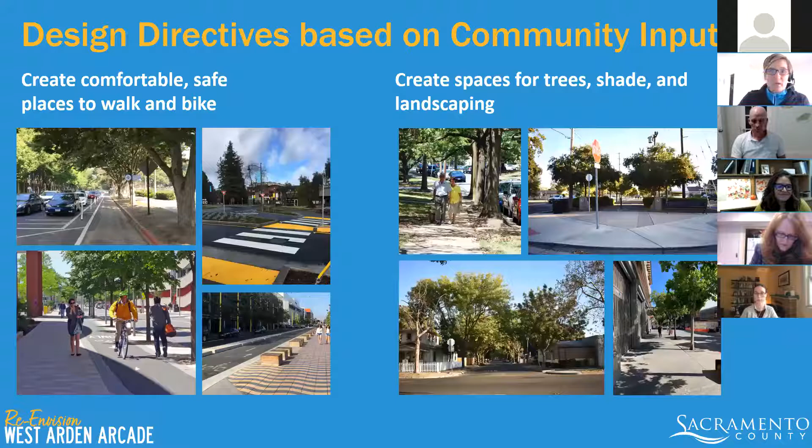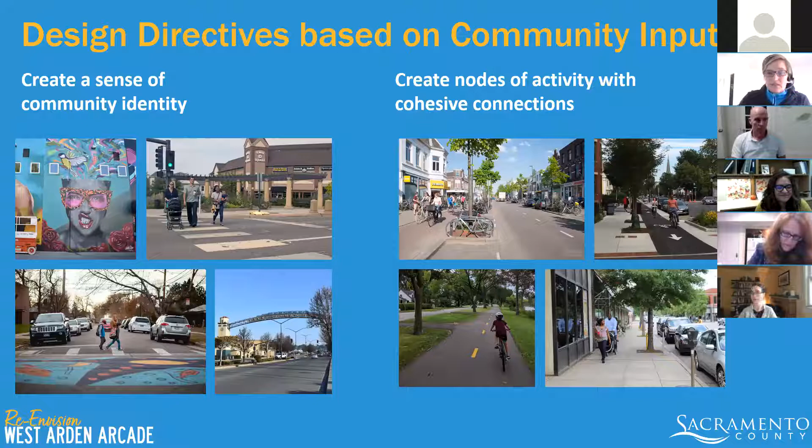So based on all the community input, I'd like to mention again our design directives: creating that comfortable, safe places to walk and bike; opportunities for shade and trees and landscaping; creating a sense of community identity; and creating nodes of activity with cohesive connections. So again, with those design directives, we dove in again this week, and I'm going to give you an overview of kind of what we worked on this week.

So we focused a lot on the elements of the street. So what does that mean in terms of designing for comfort and safety and experience? We'll talk a little bit about how that looks like on a sidewalk, bikeways, and different elements.

The importance of a network. We continue to advance the idea of these framework streets, and we'll dive into that and some examples. We'll talk about neighborhood spot treatments and those ideas there, and then we'll talk about context appropriate redevelopment, so opportunities in the built form, and what we've heard from you and how that's then advanced into some design solutions.

And then at the end, we'll talk about how it all sort of comes together at the Arden Way, specifically 2 community nodes, Arden Way and Watt, at Watt to Morse, and then Hurley and Fulton.

Throughout, we'll be doing some interactive polling during the presentation. For those of you who are joining by phone, the online polling doesn't work for you, but I want to mention that we will continue to ask these questions at the end and have a more detailed discussion at that time.

So back to the street elements. Some of our guiding principles that emerged through a lot of different conversations with folks is about considering the most vulnerable users first. So that's our design vehicle, as it were, or how we talk about it. Think beyond what we call the Americans with Disabilities Act compliance and employ best practices in universal design. So this is thinking about how we really accommodate folks who have any kind of mobility or impairments and how they navigate our streets. Safety and comfort and experience.

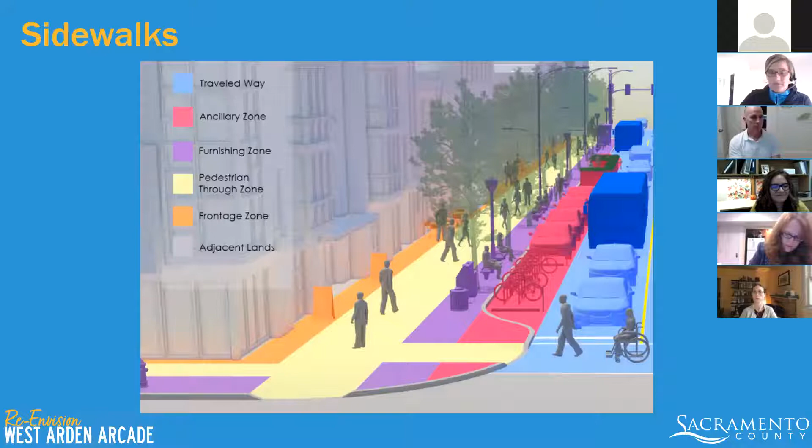Bikeways - we're talking about a number of bikeways to the community. All of the arterial streets, or main streets, network streets that you have in your community, are identified in the bike plan to become bikeways if they don't already have bike provisions. What we like to suggest to communities that have the space is to make bikeways as comfortable and protected as possible, so that's removing the bikeway from on-street if at all possible, or creating some sort of buffer.

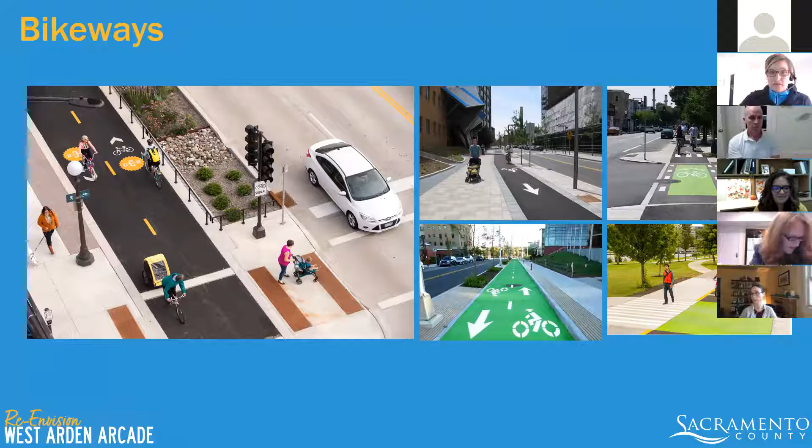Parking opportunities along the area too, as we talk about some of the redevelopments. Sometimes that means interior parking areas may be changed, reconfigured a little bit, but there are opportunities to park along the streets as well, and allowing for that to happen. Those become opportunities also for green infrastructure, like I've shown before.

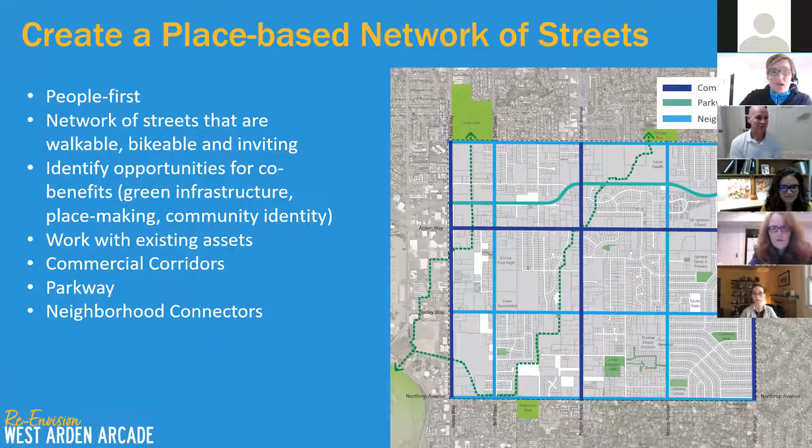A commercial corridor - those are streets we're considering, and it's part of your general plan in terms of the language. A commercial corridor is something that allows for access to different businesses.

Some of the areas in particular, streets in particular, are Howe, Fulton, Arden Way, and Watt as key commercial corridors. These are going to be perhaps the ones closest to any of the goods and services and businesses that the community has.

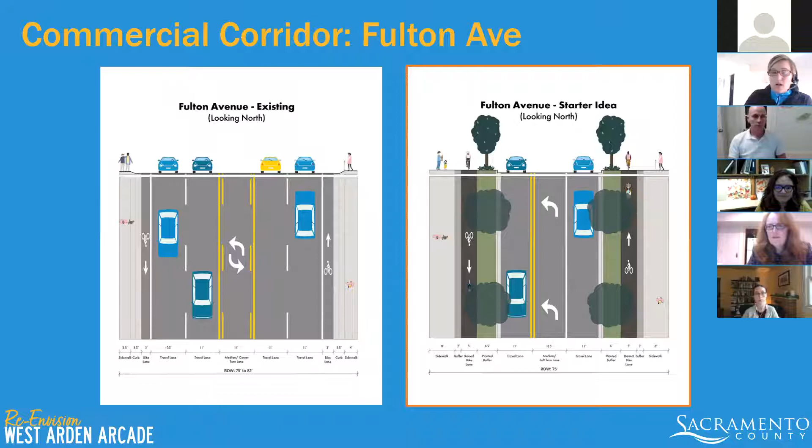Here's an example starter idea of what we're thinking. We proposed this last time, and we're saying it still has good merit to rethink how some of Fulton is repurposed to be more comfortable and to create a better walking and biking environment. You can see in this instance on the right, the graphic shows the implementation of generous sidewalks along with a separated bikeway facility, some green landscaping, and to do that, it would require rethinking the space that's allocated to motor vehicles. We've looked at the traffic volumes on the street and think this is definitely a feasible option along Fulton Avenue.

So what that might look like, again, we've shown a number of these images at this point, but bikeways adjacent and right next to the sidewalk, but clearly delineated by material changes. There's some different best practices we would suggest there. And then again, the incorporation of great opportunities for green infrastructure along these areas.

I think I'm going to pause there, and I'm going to turn it over to Malia to talk about our quick poll. So Malia.

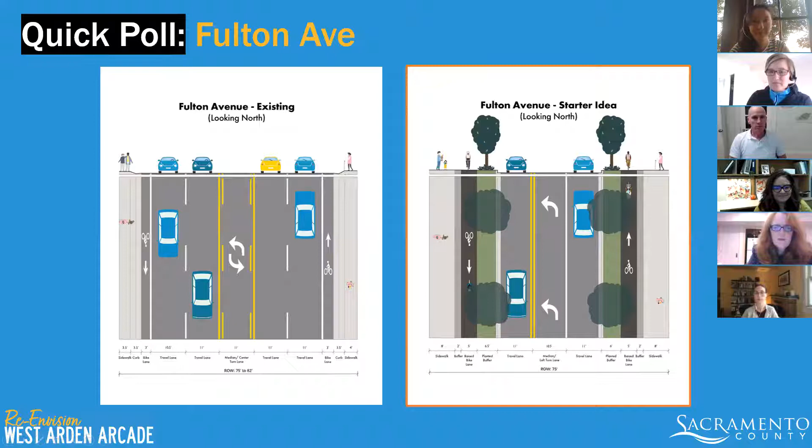Onto the Parkway, I'm going to turn it over to Ian to talk a little bit about an idea that we have for Alta Arden Expressway. We'd love to be able to call it a parkway in the future. So Ian, go ahead. Thank you, Cindy.

Well, this is an exciting corridor. It's an east-west corridor in the north part of the study area, and it just ends at Watt as a 5-lane road, and it doesn't carry enough traffic to warrant 5 lanes. So we were thinking, if it were a 3-lane road, what cool thing we could do with it, and we thought we could turn it from an expressway into the Alta Arden Parkway, and recycle the space into a fairly natural corridor, which would feel safe and comfortable for folks, as you can see in the image, creating a really nice kind of natural experience through the city.

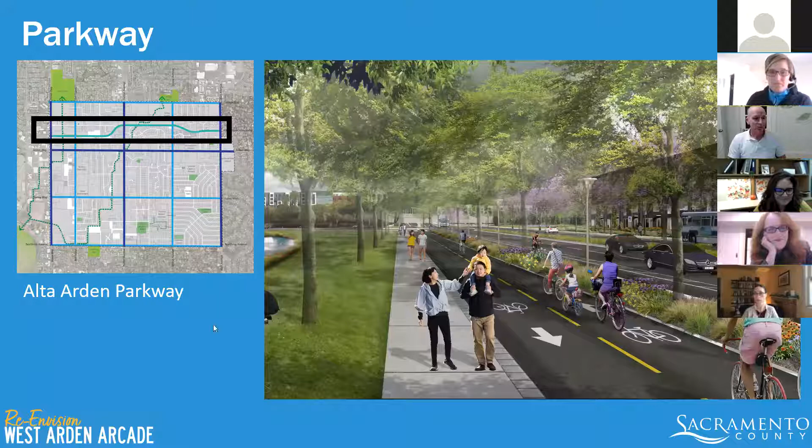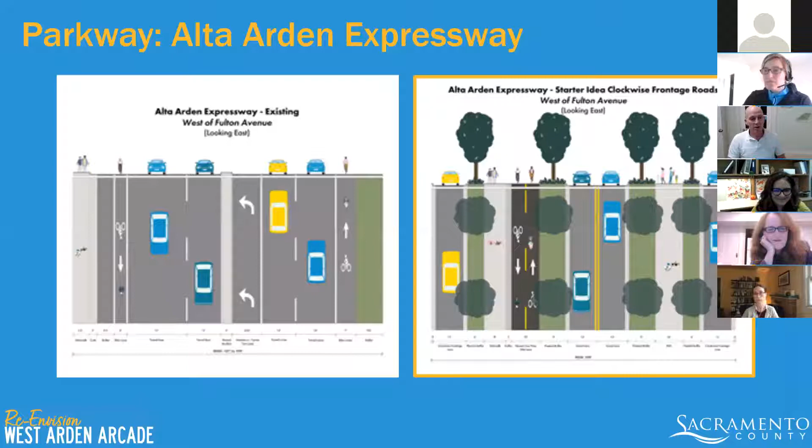We have some starter ideas to get the juices flowing. One of the characteristics of parkways is this nice continuous experience through the park, instead of stopping and starting. So one of the things we're thinking about is controlling the intersections with roundabouts as opposed to signals, which gets rid of the clutter of all the signals and creates a more natural feel.

It would go the whole length of the study area, probably involving 8 roundabouts at the 7 current traffic signals, and one at Wyda Way, I believe. So that would be the corridor.

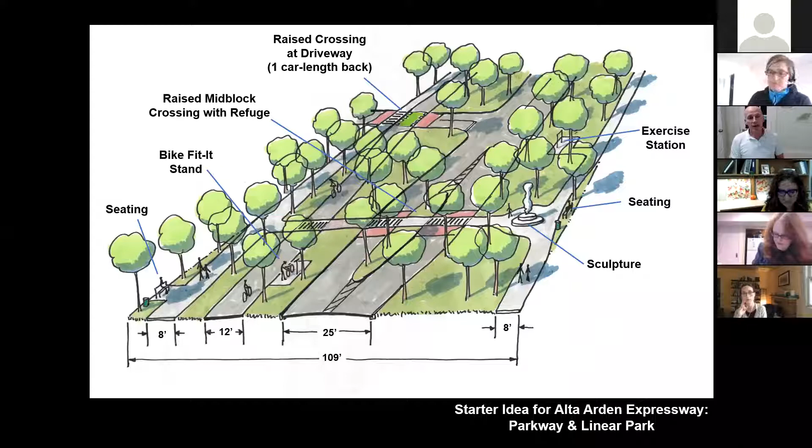One of the criticisms of roundabouts is that they're not friendly for people who are blind or have poor sight. So we've developed a roundabout design with about 10 interventions that make it much friendlier for people who can't see—for example, lining up the sidewalks properly and straight, and having tactile guides to help them find their way to the crossing and then across the street itself.

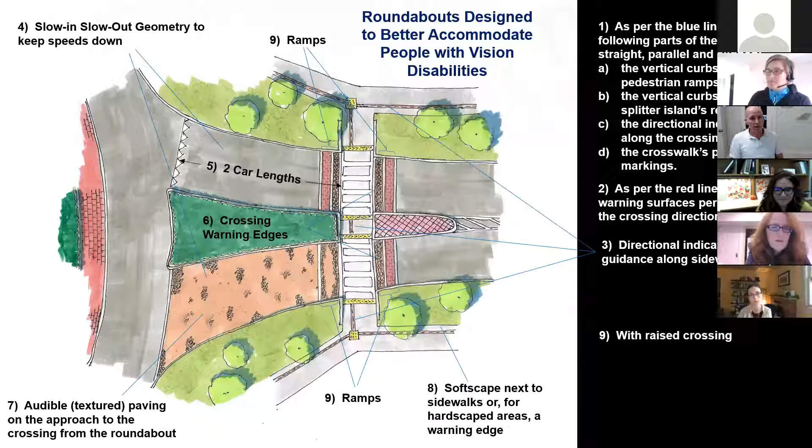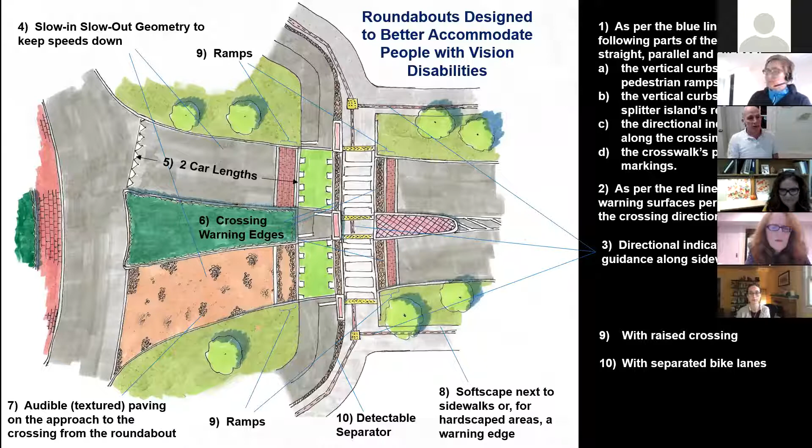That's the crossing with just the pedestrian crossing. If the bike facility were to cross, it's very similar, except with the addition of a bike facility, as shown next. This is the exact same thing, except it's got the 2-way bike facility as well, so the crossing is just a little wider to accommodate both pedestrians and cyclists. That's how you cross the street.

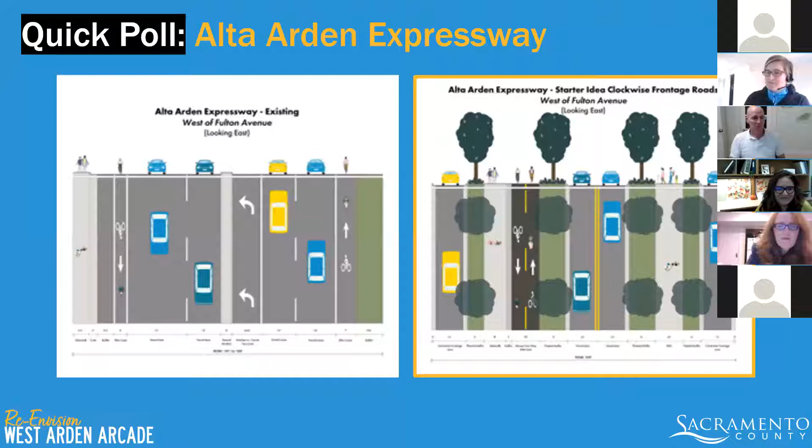Another type of street worth considering or suggesting is a neighborhood connector. These are streets that are really important to the community, perhaps a bit lower in volume, that provide connectivity—people walk and bike along these as well. These are Cottage Way, Bell Street, Northrop, Hurley, and Morse. Bell in particular serves an important function connecting folks to the neighborhood schools. So this is the starter idea we're considering there.

We mentioned this at the last discovery workshop as well and continue to get feedback on it—that this is something people would like to see: a real formalized bikeway opportunity for people to walk and bike along there, and also a more formalized sidewalk.

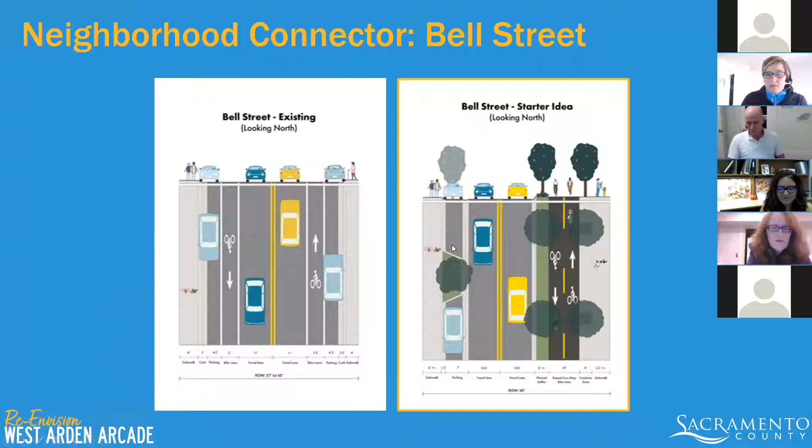So we can easily repurpose this. Right now it's one lane in each direction, and there's opportunities to really repurpose some of the space from the existing bikeway on street and the parking on one side. We can consolidate that onto one side and really make it a wonderful space accommodating all modes.

So this last poll will be for Bell Street, and the same question as before: Do you support these starter idea changes to Bell Street? You should see it pop up on your screen right now.

A couple votes coming in. We'll give it a few more seconds to see that everyone gets a chance.

Great, so similar to the previous two cross sections, it's great to hear that folks are really strongly supporting our proposed starter ideas. So thanks again for that feedback.

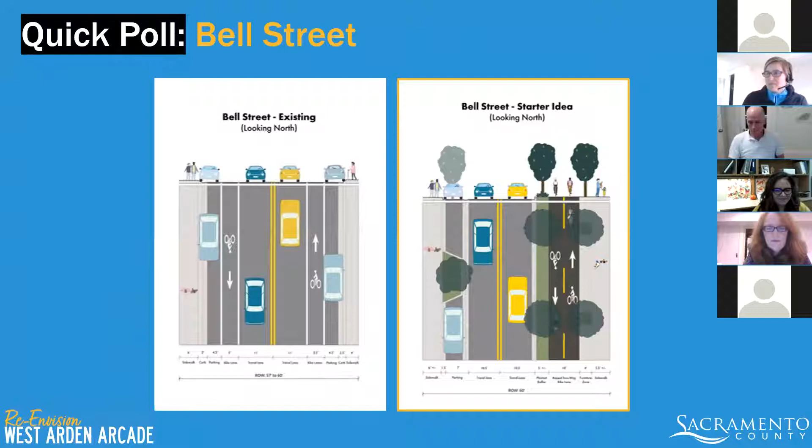Thanks, Malia. One of the things we heard last week and during this week as well is the importance of considering neighborhoods, the neighborhood streets within the area as well. We talked a little bit on Monday night about spot treatments and the options we could advance there. So we took some of the comments to heart and came up with about 7 different cross sections or spot treatments to share with you.

I'll just talk through all of these at this time. So high visibility crosswalks really increase visibility of people walking and increase the propensity of people who are driving to yield to pedestrians. These can be installed at any crossing within a neighborhood or as the neighborhood connects to and across some of the major streets.

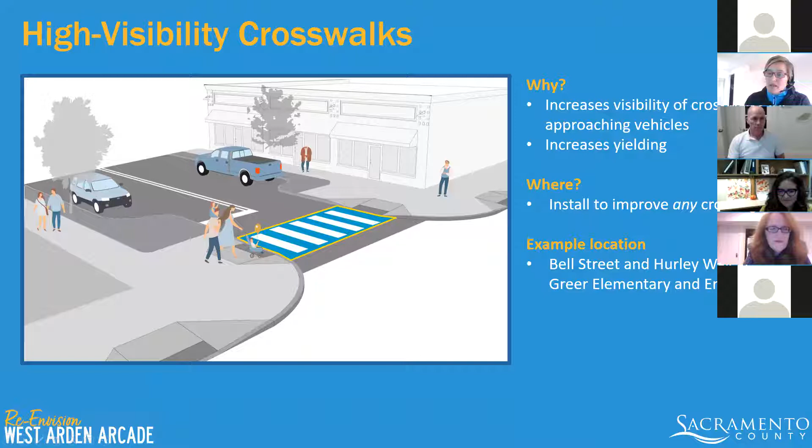Example locations, we just want to tee up a couple of those as well. Bell Street and Hurley Way, and Greer Elementary and Encina High, would be great examples of where this could work.

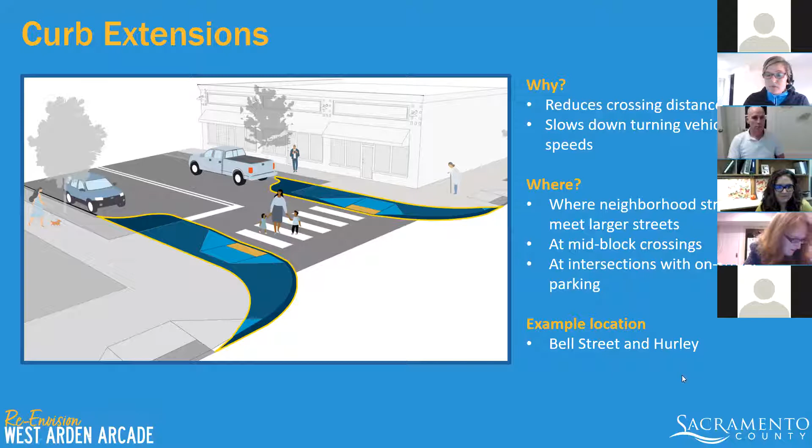Curb extensions, we've talked about this a few times, and we have opportunities for green infrastructure as well, but these are really important for pedestrian safety. They reduce crossing distances and slow down turning vehicle speeds. These could happen at neighborhood streets where they meet larger streets, also at mid-block crossings, at intersections with on-street parking as well. An example would be at Bell and Hurley. Lots of examples of where that could work.

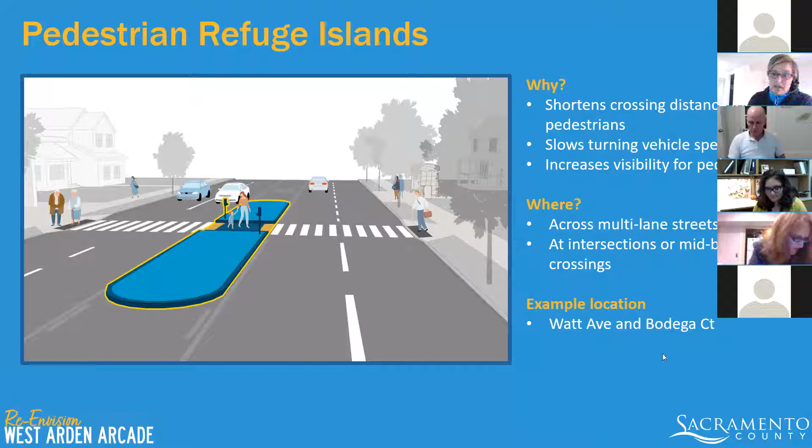Pedestrian refuge islands are also great features. You have some within your communities, particularly on Morse near the Kaiser Permanente campus. They shorten crossing distances for pedestrians, especially when you think of two different lanes going in two different directions. It basically cuts a 4-lane street down to a 2-lane street for people to cross. It slows turning vehicle speeds as well and increases visibility for pedestrians. Again, these can be very helpful at multi-lane crossings, at intersections or mid-block. Watt and Bodega would be a great example of where something like this would be recommended.

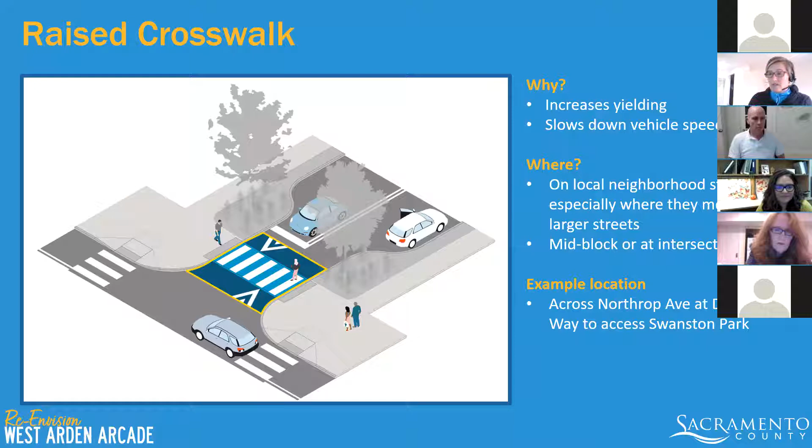Raised crossings, as well as the high visibility crossings, also help in yielding and slowing down vehicle speeds and making pedestrians more visible. They can happen on local neighborhood streets, mid-blocks, or at intersections, and in some instances we see these used at driveways as well. A place at Northrop and Dornajo, as people cross to Swanston Park, we heard about the importance of really addressing that crossing right now. There's been a good attempt at an intervention, and I think there are ways to maybe make it even better for folks.

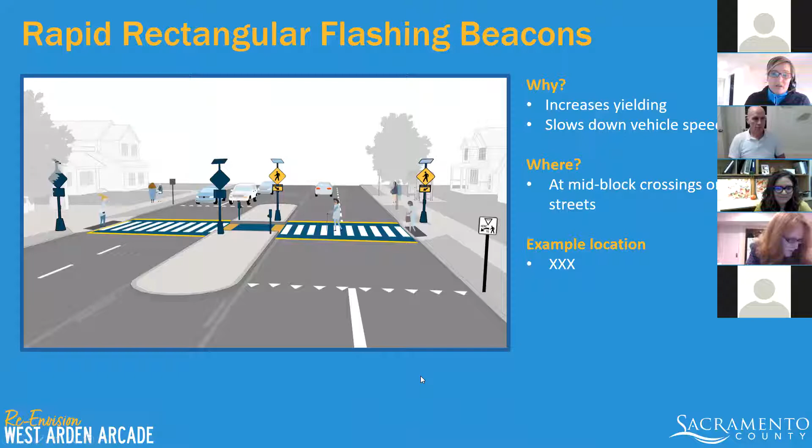Rapid rectangular flashing beacons, or RRFBs as they're called, are flashing lights that pedestrians could push that create an awareness on the street. They actually flash on and off for motor vehicles to observe, and increase yielding and slow down vehicles. There could be a number of different locations throughout the community on Watt. We see some great opportunities for them to happen as well.

Pedestrian scale lighting could really help people feel safer and be safer along streets within Arden, West Arden Arcade. It increases the visibility and makes people feel more safe as well. Any street, frankly, could benefit from more pedestrian scaled lighting, especially the major network streets.

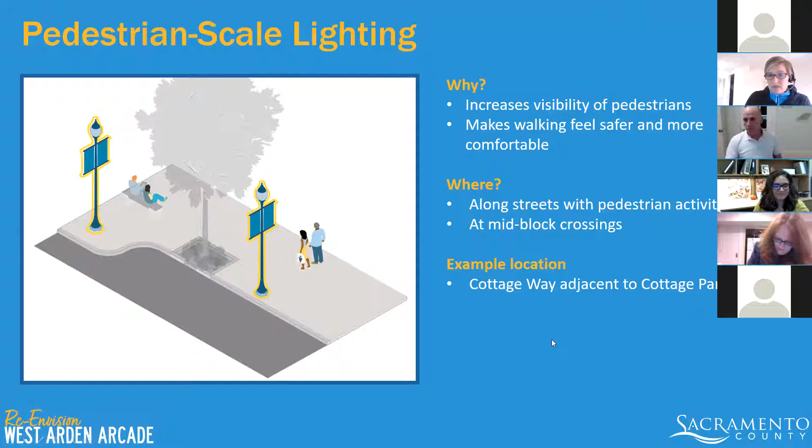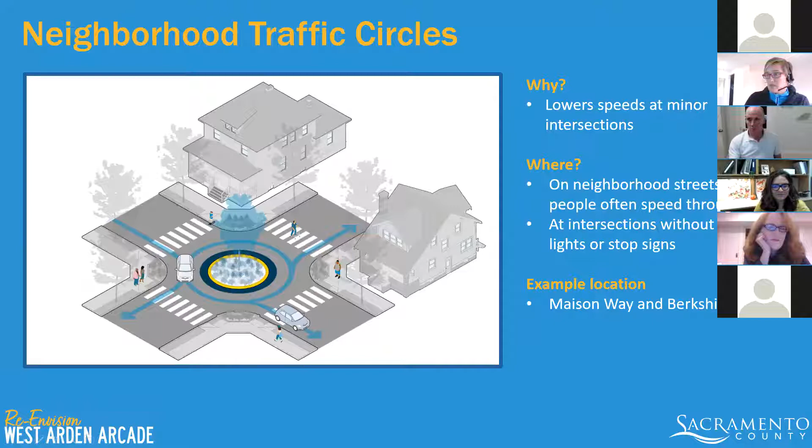I'm going to hand it off to Mitali now, who's going to talk a little bit about community assets and some of the work that they've been doing on the built form.

Hi everyone, and good evening. It's great to be here. I'm just going to run through very quickly some of the work that was done in the previous workshop, more like a recap of where we are right now.

What that means is there's this concept of a 15-minute neighborhood in which people can find it enjoyable, safe, and practical, even save time, by accessing all these destinations on foot or on bike rather than driving. We feel that West Arden Arcade already has some of the fundamentals needed to make this concept happen.

So what we did was look at this layer of all the community assets, and then we also looked at the street hierarchy that Cindy just described previously, and that led us to the concept of creating nodes and corridors within the community.

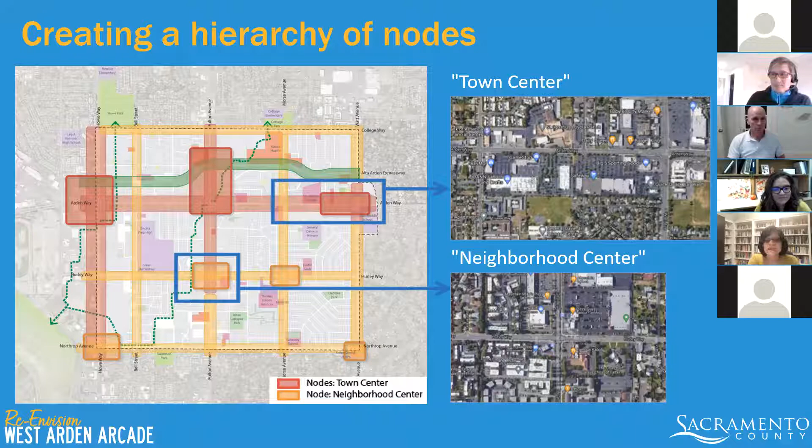These are smaller in scale. All these nodes are inherently mixed use, but the difference is that some of them are more intense and more commercial in character, and the others are more local and neighborhood serving.

At the same time, this is again a recap of what we discussed in the opening presentation a couple of days ago, which is the importance of built form in shaping the way the public realm and the street engages with what is happening inside the buildings.

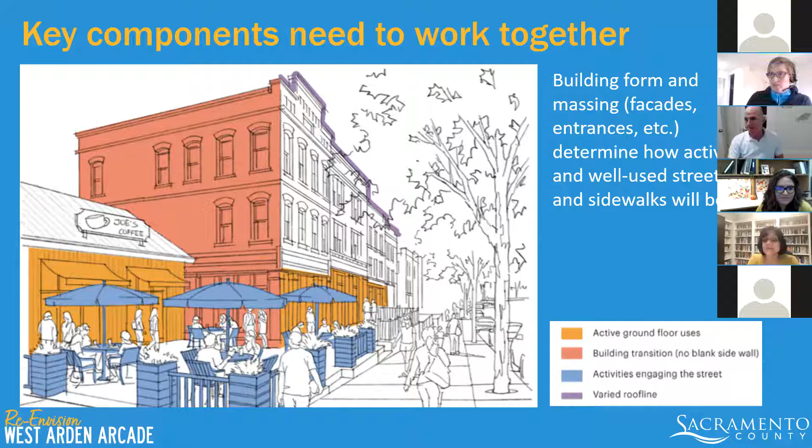So there are simple things such as the shape, the positioning, and the orientation of buildings, such as where are the entrances, what is happening on the ground floor, and what's happening on the sidewalk and the street. All of these function together and support each other in creating the kind of walkable and safe environment that we're all aspiring for West Arden Arcade.

So simple things such as orienting buildings towards the street and sidewalk, orienting buildings towards public spaces, trying to create more public spaces and adding to the public realm.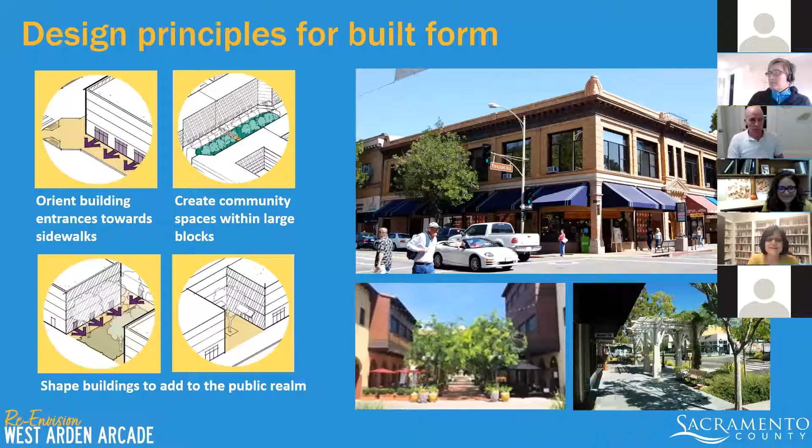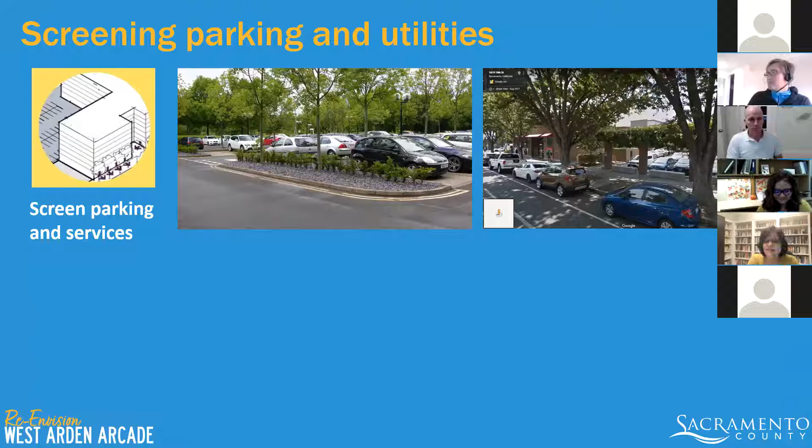Very importantly, and something very visible in West Arden Arcade, is the screening of parking and service areas. There are many different ways of doing this, but right now we're just talking about the principle that parking is a reality, it's required and needed, but at the same time it doesn't need to be what you see most of all when you're walking and even driving along streets. As you can see, this is an example.

This is from Sacramento, in which you see that this is not a very fancy or grandiose looking building. It's a small mixed use building, and behind that there is a parking lot. But there are simple strategies such as the way the building is oriented, where the entrance is located, the fact that they have these breezeways and corridors kind of shielding the parking.

That creates a very inviting environment. So you can imagine that when you're walking on the sidewalk next to this development, it would not feel that you just want to hurry up and cross quickly. It creates a better pedestrian environment. Moving on.

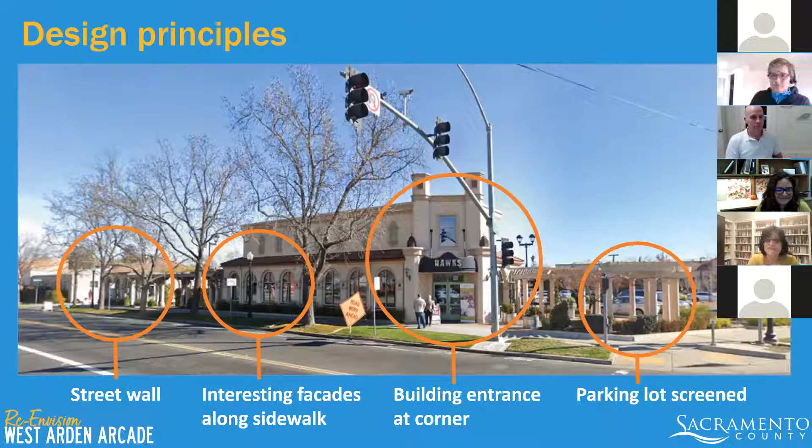During this workshop, we also discussed that considering the rather large amount of space within the community given over to parking and other such areas which are not fully utilized, what are the temporary and flexible uses we can think about to make better use of such spaces? This could be a combination of pop-up restaurants, food trucks, even temporary creation of public spaces and play areas, farmers markets. There are limitless opportunities.

I think that was a term Ian was using a few days ago, describing just what all we can do with these spaces. All it takes is imagination, and none of these need to be expensive or permanent, but they really help in creating a sense of community.

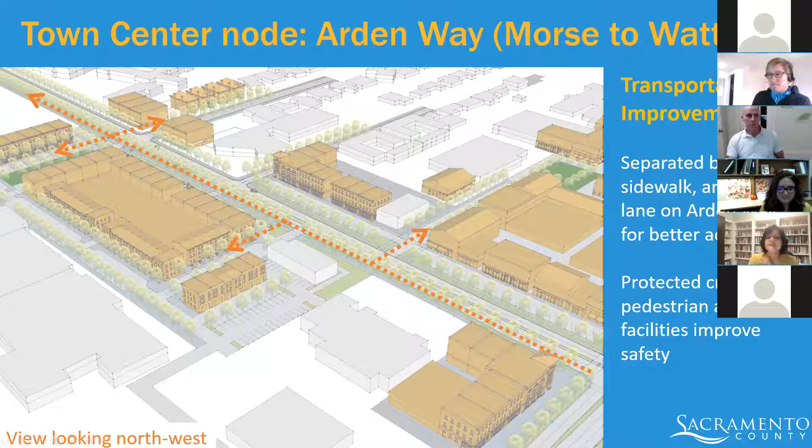I'm not going to go over these in detail since they were just discussed when the cross sections were covered. Here you see Arden Way, and the highlights in terms of transportation improvements are the separated bikeway, a much wider sidewalk, and an access lane. It's on the south side and on the north side of the main right-of-way. This access lane gives better access to all the businesses there, creating a calmer, more accessible environment that helps strengthen the mixed-use character we're trying to create. We also added a couple of protected pedestrian crossings since this is a really long block, which helps stitch the north and south sides across Arden Way together.

Those were the transportation improvements. This graphic highlights the land use and built form improvements. We tried to insert build form in places where parking wasn't fully utilized, or where we could create what we call secondary addresses. When you have really deep blocks, you can go vertical toward the main arterial, in this case Arden Way, pulling some of that activity inward. This also helps strengthen anchor tenants in places like this, which in this case is a Safeway. By creating a mixed-use environment that feeds off that energy, we attract more people, creating a new environment while further establishing the businesses that are doing well.

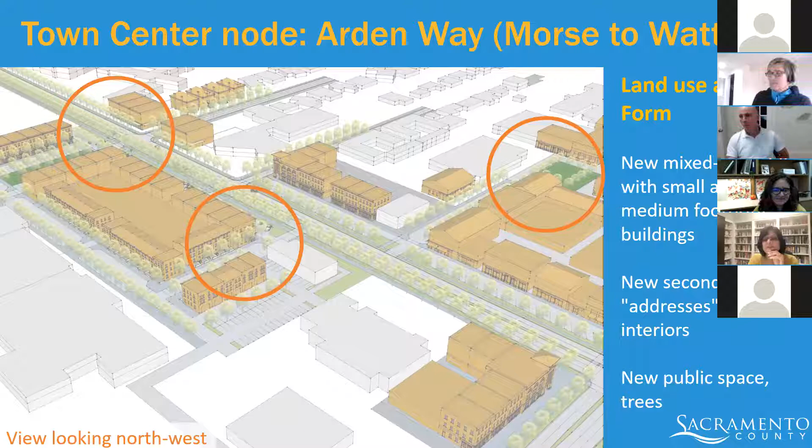Accompanying that is the addition of a lot of trees, not just in the right-of-way, but also in creating smaller scale usable public spaces and greening the area more, which was something we heard again and again. Toward the northeast portion of the site, there are a number of properties that could potentially redevelop in the future, and we can extend the street grid inward as well.

Here are a couple of views, and we can come back to discuss these in more detail during the Q&A session once these slides are done.

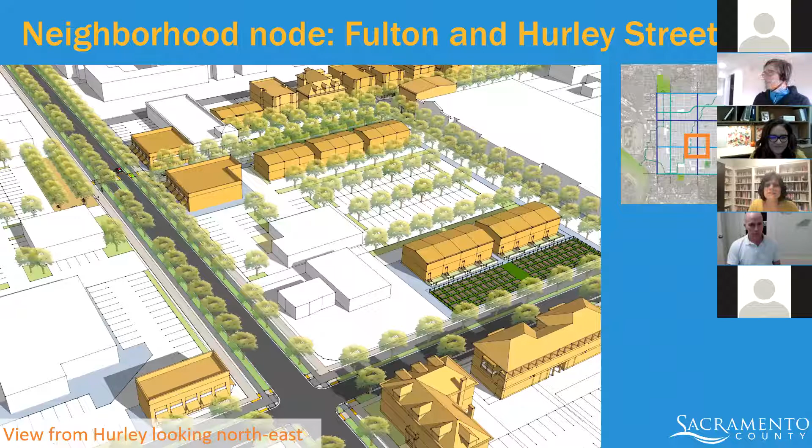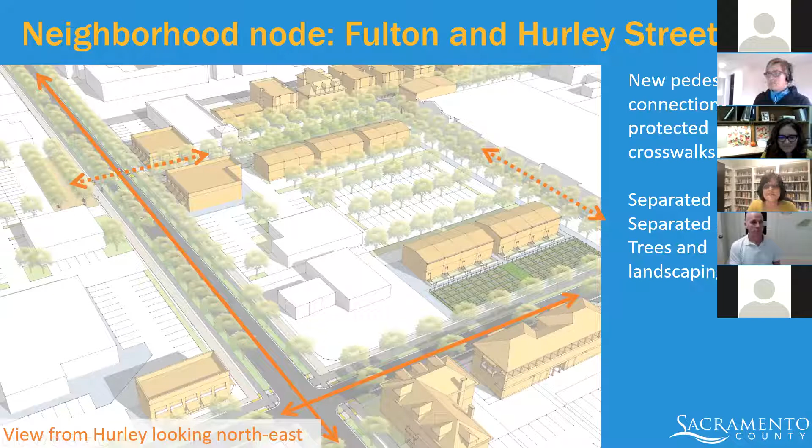Again, just highlighting what the transportation-related moves are. The improvements on Fulton Avenue were just discussed, so I won't get into that, but essentially it's creating a much calmer and safer environment for pedestrians, bikers, and cyclists. In the dashed line, you can see where we're trying to create additional pedestrian connections across Fulton, meaning we would have protected crosswalks. This is a way of trying to connect the users on either side of the street, to increase mobility and access for pedestrians and all users.

Now, in this example, the addition of newer, smaller scale uses creates the opportunity for different kinds of environments in different parts of this node. For instance, on the lower right-hand corner, you can see this has good southern exposure, and this piece of land is a good opportunity for creating maybe a community garden. This need not be a permanent use, it can even be for a certain amount of time, after which the uses can be re-looked at. But this is an area where we feel such a function can work well.

And it also ties back to the fact that Hurley is used a lot by school-going families and students. This was also the street on which Soil Born Farms was established. I don't believe they're there anymore, but there is a certain legacy we can tie this design idea back to.

Towards the upper part of the image, we're trying to stitch together two ideas and create this pedestrian connection. More towards the left side of the image, there's an area where we're not adding a new building, but the scale of the parking lot means you can still keep a certain amount of parking while also using the space for a different kind of function. Again, it can be temporary or permanent, anything from a plaza to a food truck venue, or even a place for outdoor dining.

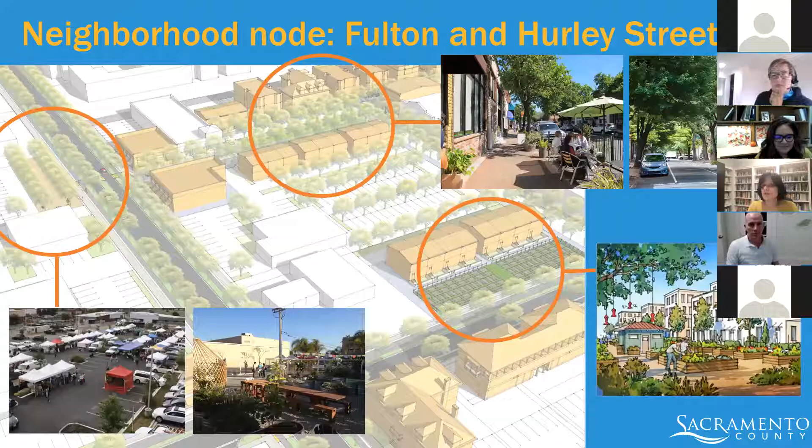So by the addition of these smaller scale pads and this kind of mixed use environment, it will offer more opportunities for retail to try and diversify and evolve as the years go by. So we're just trying to insert some inherent flexibility into the design concepts being forwarded here.

Next slide. So this is an illustration again looking east, roughly in that location of that crosswalk we were just looking at. You can see there are smaller scale buildings, mixed use or just retail on the lower floors. All the principles we talked about earlier about how the built form should address the sidewalk and create an environment where people feel like being - all those are being illustrated through this example. At the same time, we're creating more opportunities for placemaking and for places for people to gather and be.

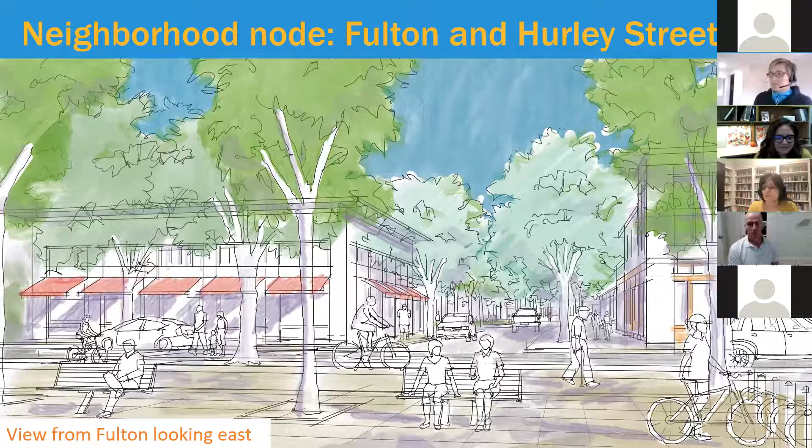So we're going to do another quick poll, this time about the neighborhood node at Fulton and Hurley streets. Natalia was talking about mixed use - this question is just about housing. Do you support the addition of housing at this neighborhood node at Fulton and Hurley? We'll give folks a little bit to enter their answers.

All right, a couple more seconds. Looks like most people have entered the poll. So we have a majority of strongly support, but a couple folks who are against or neutral as well. Thanks again for that feedback.